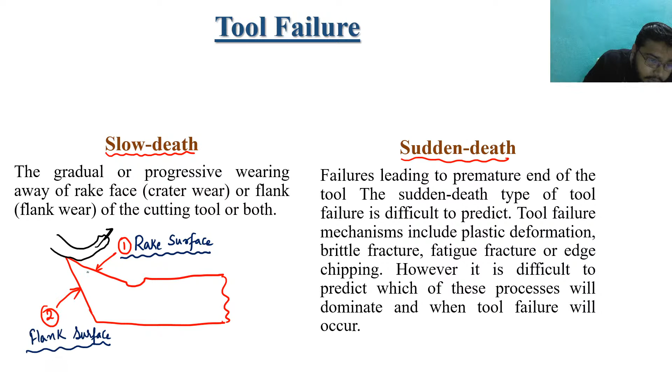So what happens when we are machining: suppose the chip flows like that, in this way. So the chip will try to erode these parts. This part of the cutting tool gets eroded, and sometimes the flank surface also gets eroded.

So there is gradual or progressive wearing away of the rake surface. This gradual wearing in the rake surface is known as crater wear. Whatever wearing happens in the rake surface is known as crater wear. And on the flank surface, whatever wear and tear of the tool happens is known as flank wear. These two are the slow death type.

Why slow death? Because by varying the velocity and machining time, these things are relatable, and due to these things the failure takes place. But there are some sudden deaths too. Its meaning is failures leading to premature end of the tool. The sudden death type of tool failure is difficult to predict.

Suppose you are machining and all of a sudden the tool fails - what is the reason behind it? It is very difficult to predict sudden failures. Tool failure mechanisms include plastic deformation, brittle fractures, fatigue fracture, or edge chipping. However, it is difficult to predict which of these processes will dominate and when the tool failure will occur. So we cannot predict sudden failure, but we can predict slow failures, which are progressive and gradual, and which we can see with the naked eye.

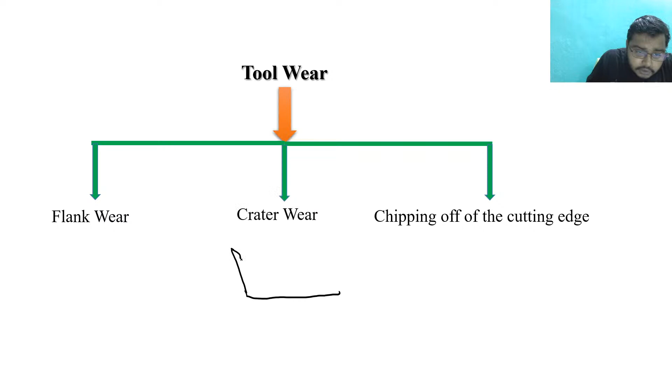So what happens on the rake surface? You will find something like that. So you can see here your rake surface. Here your rake surface is having a lot of deformities, right? A lot of wear. So you can see tool get weared out from the rake surface.

Similarly, for the crater, for the flank wear, the flank part of a tool gets weared out. This is the flank part which gets worn out. Fine. So this is how the tool wears. Generally tool wears we have seen are only flank wear and the crater wear. These are the two general things that you have to study.

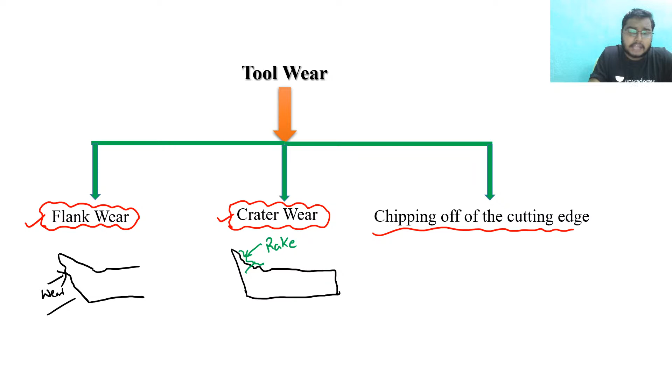So you know what the chipping off of the cutting is, I have already explained you. So now let's analyze these two wears, flank wear as well as the crater wear. So I have already told you what is the flank wear. So flank wear, any problem?

See, suppose earlier you are having the tool like this. Earlier you are having a tool like this, and you are machining it. So when you are machining, this is how the chip will move.

Now see, when your flank wear is there, what will happen? Earlier you were able to do this. Now due to the flank wear, your flank size will get reduced.

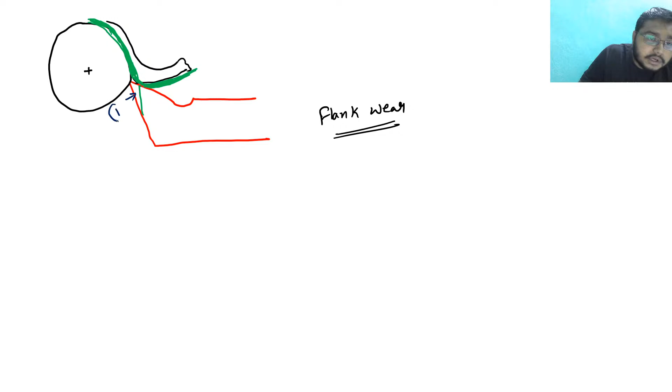So you can see the consequences of the flank wear. So earlier, suppose this is stage 1, before flank wear, and stage 2 can be written as after flank wear. Because after wearing, its size gets decreased. So due to this flank wear, the amount of chip that is removed got less.

So the amount of chip removed lowers down. Clear? So these are the consequences of decreasing flank wear, when your flank surface gets eroded, gets weared out. So these are the consequences of flank wear.

Let's see what are the reasons. So flank wear is also known as wear land. So the reason for flank wear is abrasion by hard particles and inclusions in the workpiece. So what happens, please understand.

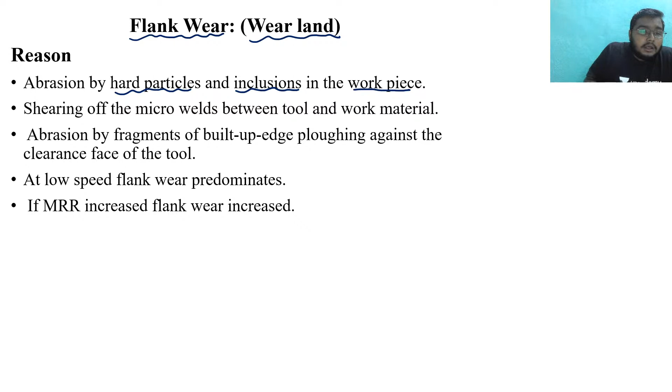So when you are machining a workpiece, suppose when you are machining a workpiece, and you have a tool, understand what will happen. So abrasion by hard particles, what happens? In the workpiece, there might be a condition in which some hard particles, any hard particles, may exist in that workpiece.

So any hard particles may exist on the workpiece, and those hard particles may be some inclusions also. So what happens when you are machining, when you are giving some velocity v and machining, a time will come when this tool will get interact with these hard particles. So suppose this is your tool, and suppose this is the hard particles. So the tool is moving, moving, moving. A time will come when this hard particle gets interacted with this tool.

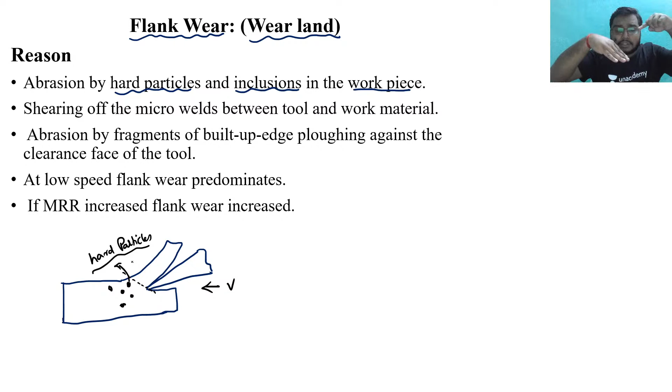All of a sudden this hard particle provides a shock, and this shock results in the wearing of the tool. So due to this abrasion takes place. So this is a wear mechanism. Let me write clear: abrasion is a wear mechanism.

So abrasion is a wear mechanism. Clear? Next is...

Shearing off the micro welds between tool and work material. What happens when chip is moving? When chip is moving and the tool is also moving at velocity v, a time will come at this point where some micro welds form between the tool and the chip, between the tool and the workpiece. These micro welds get sheared, and hence the wear of the tool takes place.

Next is abrasion by fragments of built-up edge ploughing against the clearance face of the tool. At low speed, flank wear predominates. So this is the most important thing, that at low speed, flank wear will be more. And if MRR is increased, flank wear will increase.

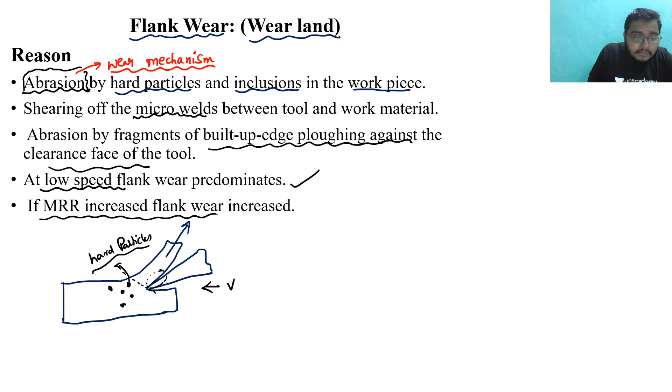Next thing is, flank wear directly affects the component dimensions produced. This is the first point. You have already seen how the flank wear can affect the component dimension produced. Earlier the dimension produced was such that chip movement was more.

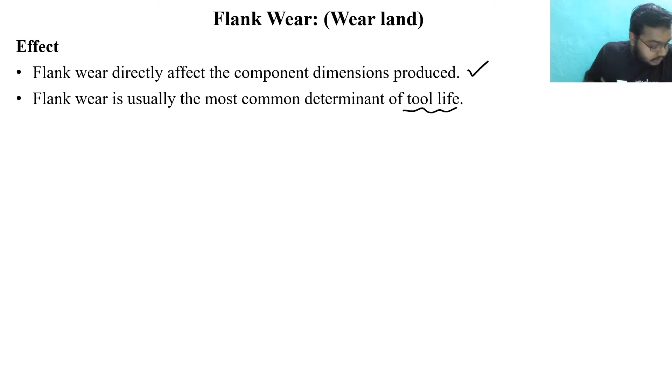Start from previous two slides, from this flank wear effects. In flank wear, what are the effects of the flank wear? The first point is flank wear directly affects the component dimensions produced. Yes, I am repeating. Flank wear directly affects the components dimensions produced. How does it directly affect the component dimensions produced? We have seen here what happened.

This is, suppose, before the flank wear and after the flank wear situation. Before the flank wear, the amount of chip removed from the workpiece was more, but after the flank wear, the amount of chip removed is less. So it directly affects the component dimensions produced. It signifies how much dimensions of the chip get removed or how much of the dimensions of the workpiece get formed. These things depend on the flank wear.

Clear? Next is, flank wear is usually the most common determinant of tool life. So to predict the tool life, to analyze the tool life, flank wear is a very important point. Clear?

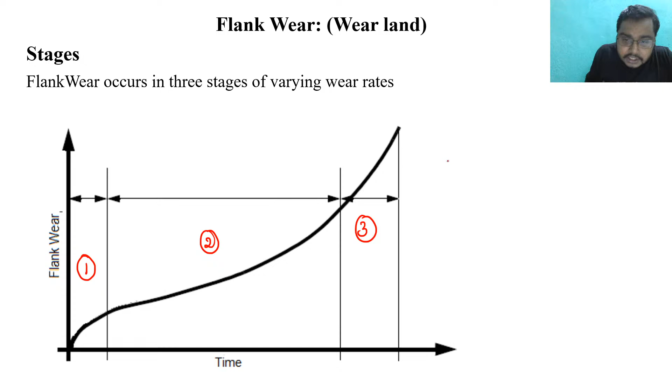Clear to everyone? Now, flank wear occurs in three stages of varying wear rates. So basically flank wear occurs in three stages. What are the three stages? First stage is primary. Second is secondary. And the third is tertiary.

So these are the three stages which you can see in the graph. I have pointed these things with the numbers 1, 2 and 3. On the y-axis, flank wear is plotted, and on the x-axis, time is plotted. Based upon the time, how the flank wear varies and what is the significance of each stage, let's study in this slide.

Primary wear is the region where the sharp cutting edge is quickly broken down and a finite wear land is established. So in primary wear, which is the first stage, the sharp cutting edge is quickly broken down. In this stage, the cutting edge is broken down. So this is the primary stage.

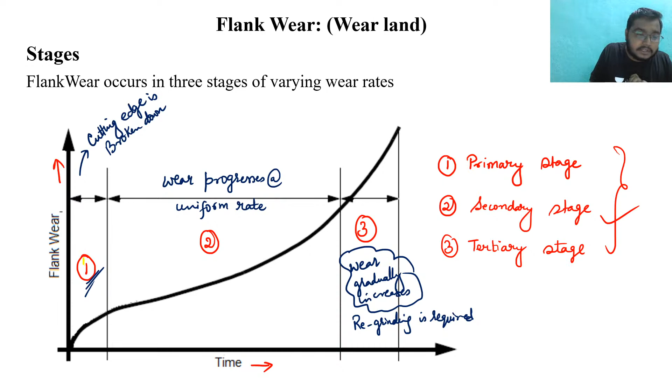So basically, there are three stages of flank wear. First is the primary stage - in the primary stage, the cutting edge is broken down. Next stage is the secondary stage, and in the secondary stage, wear progresses at a uniform rate. Third stage is the tertiary stage, and in this tertiary stage, wear gradually increases and regrinding is required.

Yes, Indrajit, sharpening of the tool is required. So basically this was the story of flank wear.

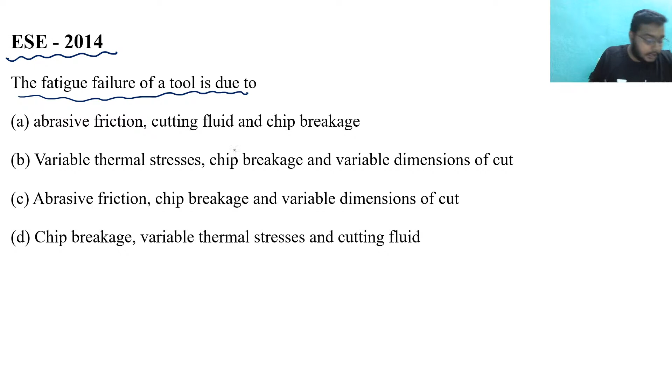See here, in fatigue failure of a tool - in machine design what you have studied, what is fatigue, or in strength of materials you may be studying this. What is this fatigue?

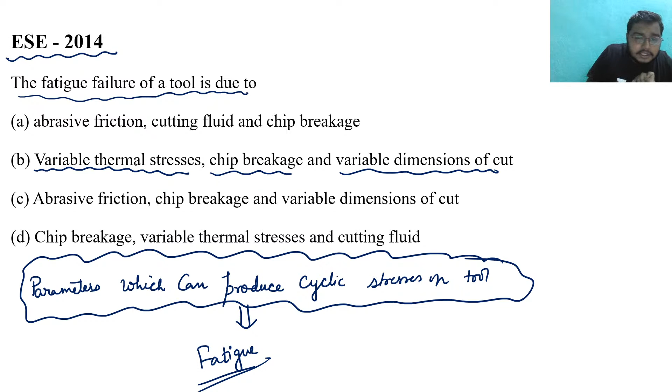In terms of mechanical engineering, fatigue means that due to a lot of loading, stresses and everything, material gets fatigued. These things are due to variable thermal stresses, chip breakage. So keep in mind the parameters which can produce cyclic stresses on the tool - this is important. You just have to see which parameters can produce cyclic stresses on the tool, and these things are leading to fatigue. Clear? So variable thermal stresses, chip breakage and variable - everything is there in this option. So option B is your correct answer.

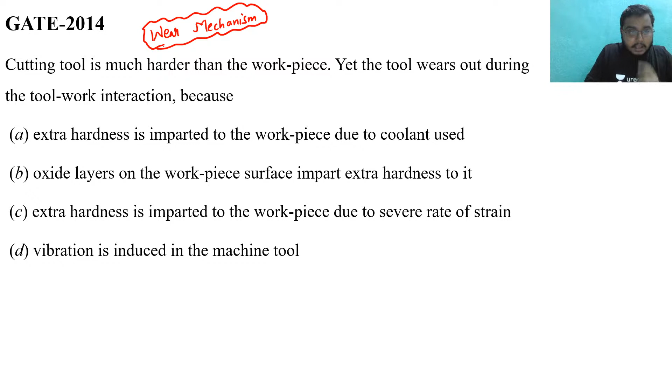Tell me the answer. Okay, Mukta has told the answer of C. I think you are telling about the previous question. So, yes, that is correct.

But once you understand that wear mechanism, then you will be more comfortable to tackle those questions. That's why I left that question.

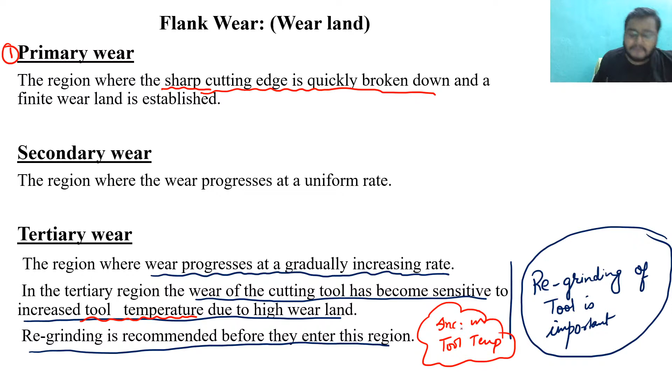What is the second thing? In this, the cutting tool has become more sensitive to increased tool temperature. So there is an increase in tool temperature, and this increase is very drastic.

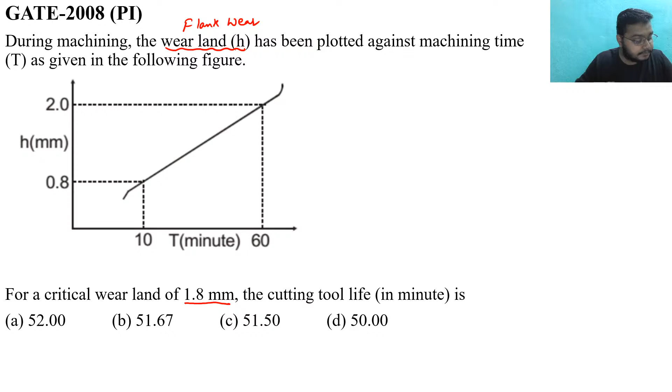Can you tell me what is the logic to solve this question? What should be the logic to solve this question, or what should be the step?

Yes, Asis has given a hint by using a straight line. See all of you, for point 8 and 10, this is the one coordinate that we are getting, and the other coordinate that we are getting is 10 comma 0.8. Another coordinate that we are getting is 60 comma 2.

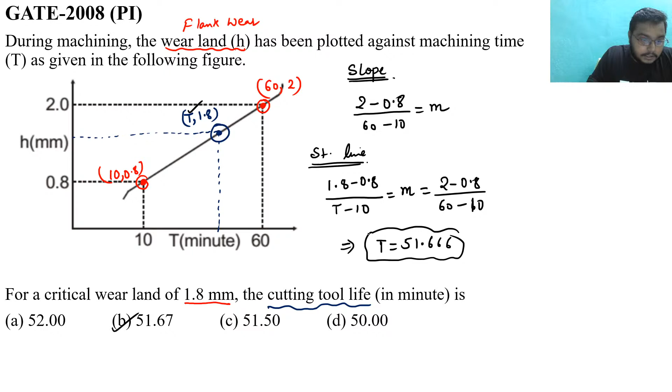Okay, okay. So I got a reply that everything is clear.

So now we are going to see the crater wear. We know that on a rake surface, whatever wear is there, that is known as crater wear. Why is it known as crater? Because the wear looks like a crater, and hence the name is crater wear.

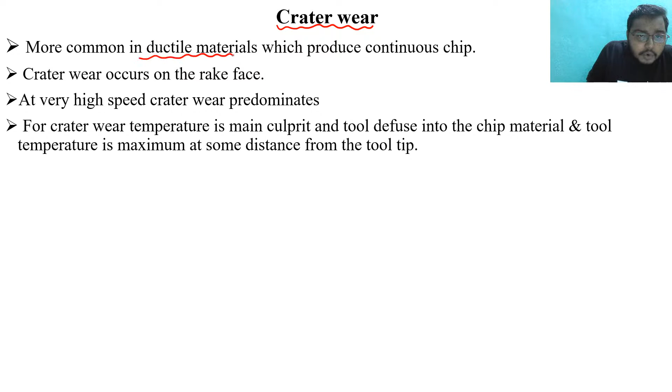It is more common in ductile materials which produce continuous chip. What is the most important point? It occurs in ductile material, and we have already seen in the chips lecture that ductile metals generally produce continuous chip. Crater wear occurs on the rake surface.

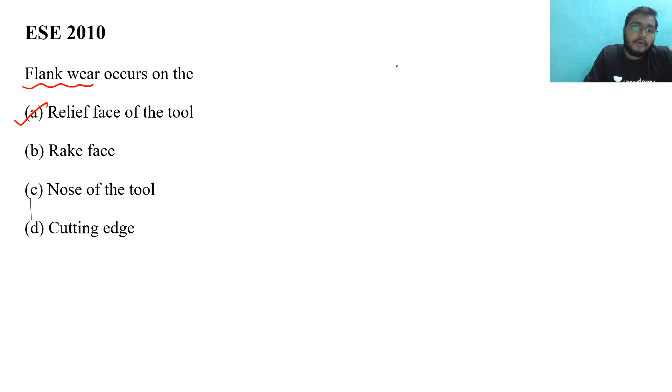This is understood. Now, at very high speed, crater wear predominates. So high speed is for crater wear, and for flank wear, low speed is there.

Can you relate those things? In flank wear, low speed will be there, and high speed will cause problems on the rake surface, and in that rake surface, crater wear will be there.

Next, for crater wear, temperature is the main culprit, and the tool diffuses into the chip material. Tool temperature is maximum at some distance from the tool tip.

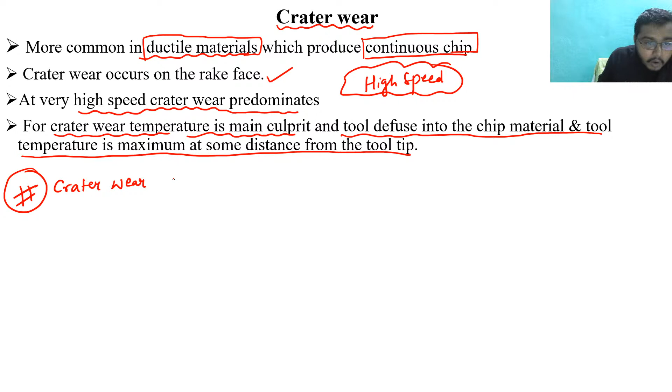So the most important point to note is that crater wear always starts at some distance from the tool and chip interface.

This is because at that point, the tool and chip interface temperature is maximum. This is the reason why crater wear always starts at some distance from the tool chip interface.

So the most important thing is that it happens due to temperature. Temperature is maximum, high speed is there, ductile material will be there, and it occurs in the case of continuous chip. So these are some of the key points.

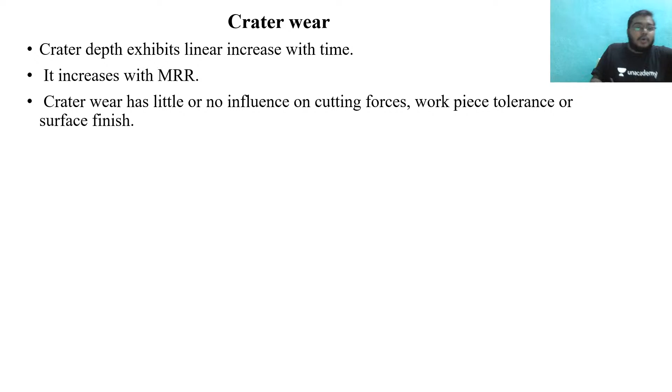So crater wear increases due to the material removal rate. The first point is that it increases with MRR. This is the thing, that it increases with the material removal rate. Clear?

Next is that crater depth exhibits a linear increase in time. We have already seen this, the linear increase over time. Crater wear has little or no influence on cutting forces, workpiece tolerance, or surface finish. This is an important point. So this is all about the story of crater wear.

See, in high speed, what happens, Kiran? At high speed, the temperature at that point gets increased. The temperature at the rake surface gets increased, and due to the increase in temperature, there is wearing.

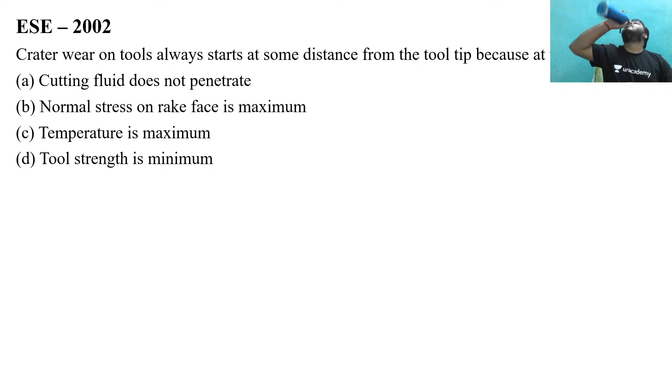See, I have just explained you. The crater wear always starts at some distance from the tool chip because due to the tool and chip interface, temperature is maximum. So temperature is your maximum, and due to this reason the crater wear on the tool always starts at some distance from the tool chip interface.

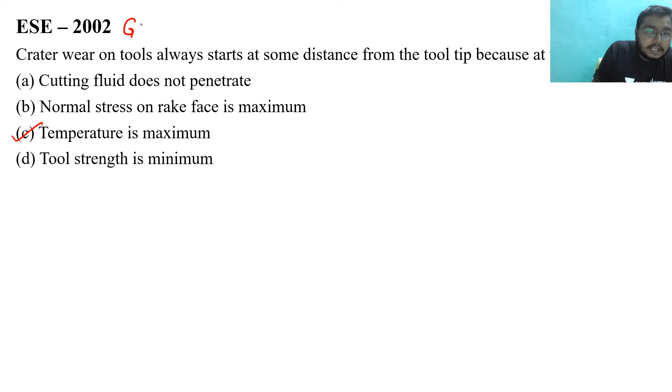Let me tell you, this question has been also asked in GATE. I don't remember the actual year, but yes, I could remember that this question was asked in GATE also. Next, tell me the answer.

Same thing is there. Tool temperature is maximum in that region, right? Different examinations ask this question because it is one of the conceptual questions, and once everything is understandable to you, all questions will become solvable.

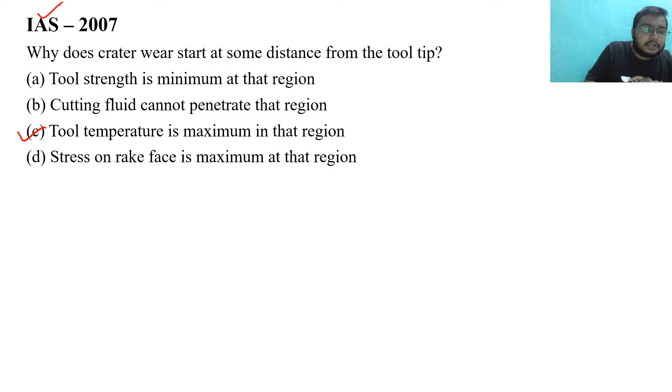Next, see again, IAS 2007. So what is that in this question? Crater wear starts at some distance from the tool tip because tool temperature is maximum at that region. Clear, sir? So back to back same questions in different exams. It has been asked in GATE, and it has been asked in ESE 2002, IAS 2007. Same question is there, asked at multiple places.

Till now, everything is clear to you. Now I'm going to start a new subtopic: wear mechanism. Let me know if you have any doubts, or I will start the new topic, wear mechanism.

Okay, so I assume that you don't have any doubt since you are not telling me. So now we are going to discuss what are the wear mechanisms that are involved in this tool wear. First is your abrasion wear.

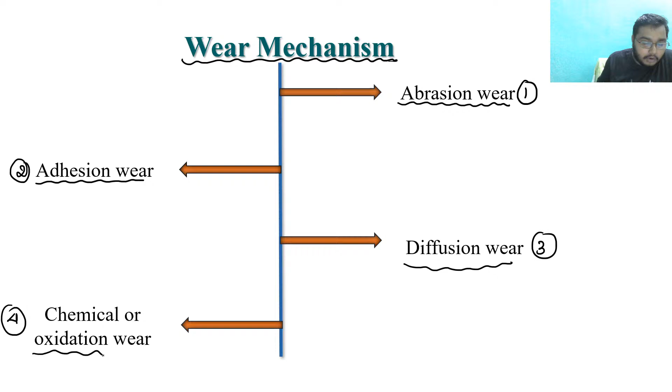First is your abrasion wear. What happens in the abrasion wear, we are going to see at the later stage. Next is your adhesion wear. Third is your diffusion wear. Fourth is chemical or oxidation wear. Let's see one by one the wears.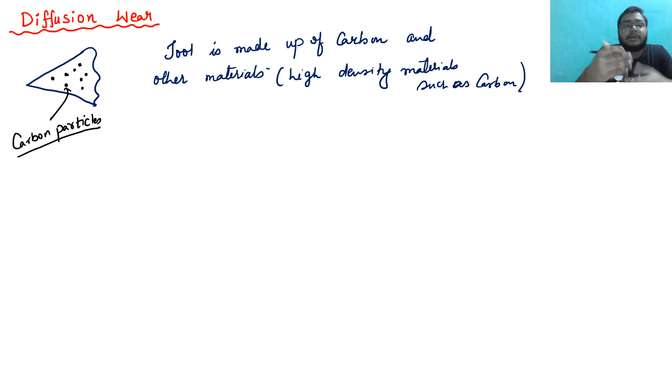So now what happens is that this tool is made up of carbon and other materials. These materials are high density materials such as carbon. So this is the tool, the story of the tool. Tool is made up of some carbon or other high density materials, more specifically carbon.

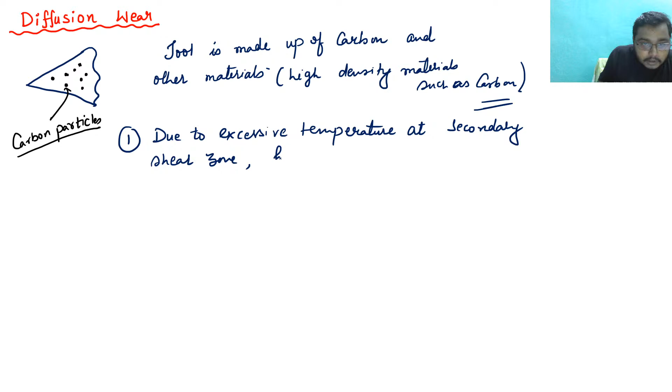Now see, due to excessive temperature at the chip and tool interface, at the secondary shear zone, high density particles from the tool go to the chip. What happens from the tool? High density particles go to the chip. That is, the carbon particles move to the chip. Now see the condition.

What is the problem? My audio video is clear to you or not? Not clear? Why the hell there is so much of problem?

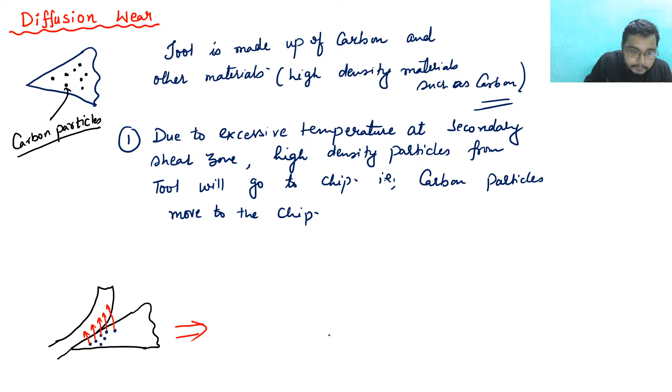So what will happen is that carbon particles will move to the chip, and hence when it moves to the chip, it simply means that tool becomes weaker. Clear? How is tool becoming weaker? Due to this diffusion mechanism. So just what is the gist? Carbon particles move to the chip due to the high temperature.

So this is the basic thing, and due to this, tool becomes weak. So weakness in the tool. Clear? So I got the answer from you, everything is clear. So this is the story of the diffusion. Now next is your adhesion.

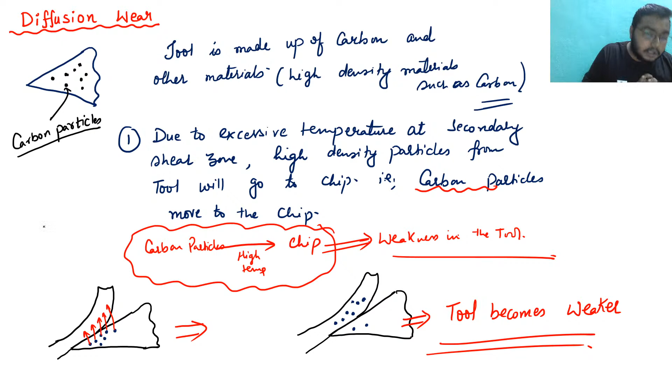Next is your adhesion. So what happens? Let me tell you one thing. What is the key takeaway point from this? We have seen diffusion wear is due to the molecular transfer.

Clear? Diffusion wear, why does it happen? This is only because of molecular transfer. What is the molecular transfer, sir? Carbon particle, that particle is the molecule, and this molecule gets transferred to the chip. So this is the phenomena.

Next is the adhesion. Now see what happens in this adhesion. At high temperature produced at the chip tool interface, shearing action of chips takes place.

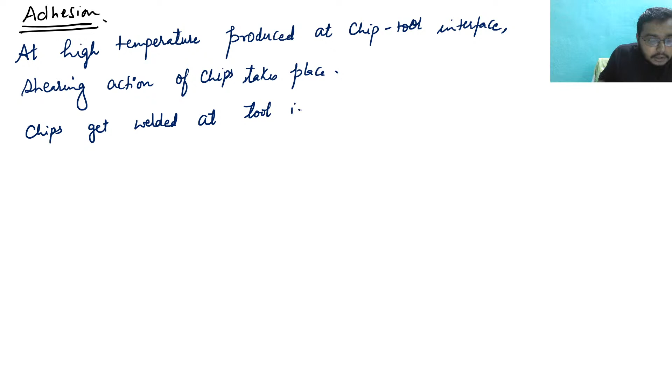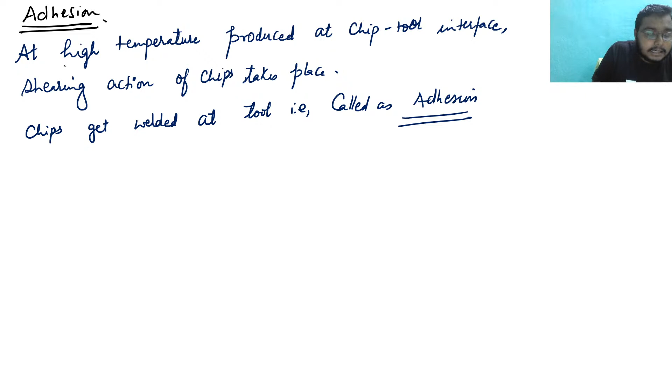And due to this, chips get welded at the tool, that is called adhesion. What happens here is that at high temperature produced at the chip tool interface, shearing action of the chips takes place, and this chip gets welded at the tool.

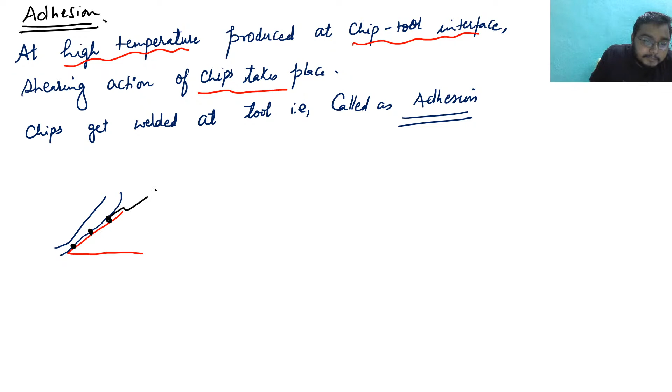Suppose this is your tool and this is the chip. So what happens, the part of the chip gets welded. Suppose at this point it is micro welded, at this point it is micro welded, at this point it is micro welded. So sometimes this micro welding takes place, and that part gets adhesed, right? Due to the adhesion, micro welding takes place.

And what will happen once the part gets micro welded? So after using, whether that part will erode the tool or that part will stick to the tool. Clear? That chip part, whether it will erode the tool or stick to that tool - in both cases, the wearing of the tool takes place.

Yes, Kiran, right. Built up edge is also because of adhesion. Yes, correct.

So this is the thing in adhesion, right? This is the story of the adhesion. Now I'll explain the next one. I have to take some slides.

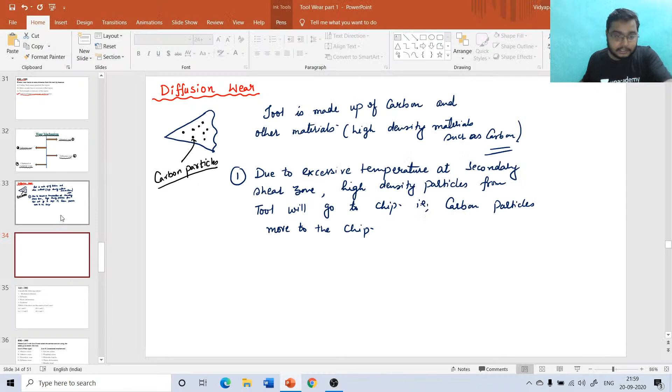So now I'm explaining to you the abrasion. I don't think you have any doubt till now, because I'm explaining very slowly as well as very neatly, so you should not have any confusion. But even if you have any confusion, let me know. Abrasion, next wear mechanism is your abrasion. So one most important thing is there.

So what is the key takeaway point from this adhesion is that there is a formation of metallic bond in adhesion. Clear? So what is the thing that we are learning, slowly and slowly? Due to the molecular transfer, diffusion wear is there, and due to the metallic bond, this adhesion takes place. Clear? Next is your abrasion.

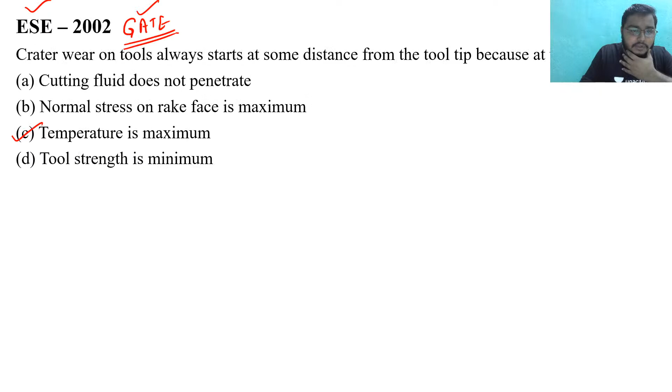Now see, I have already told you, in this question when I was discussing with you - let me find that question. When I was telling you about flank wear, in this flank wear, this one thing was there: abrasion by hard particles and inclusions in the workpiece. What is the meaning of that? I have already explained at that time, but let me explain once again. Hard particles and inclusions are there in the workpiece.

So suppose this is your workpiece. Okay, suppose this is your workpiece.

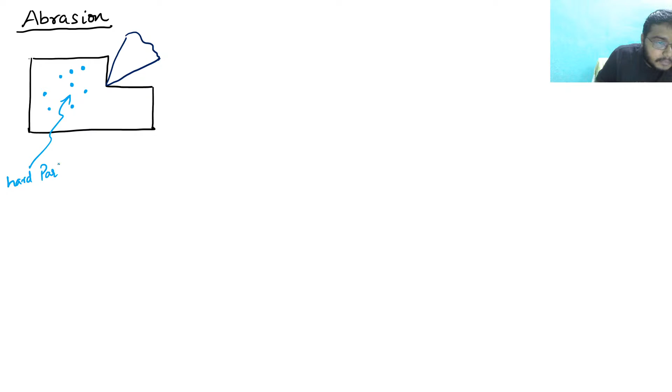Okay, so this is the tool, and in this workpiece some hard particles are already present. Let these things be the very hard particles, that is carbons or inclusions. So these are your hard particles plus inclusions.

So what will happen when you are giving the velocity v? At a time these hard particles get interacted with this tool, and this hard particle will impart a shock in this tool, and hence there is a sudden shock, and due to this sudden shock abrasion would be there. Suppose this is your tool, so earlier this was the tool structure, and when the abrasive particle strikes it, the tool structure gets damaged drastically.

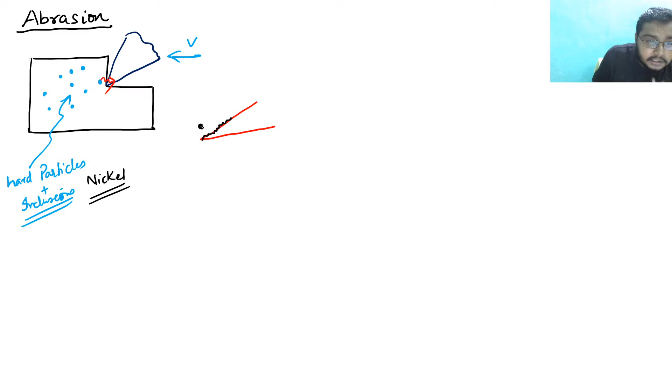So suppose the hard particles are sometimes like nickel, carbon are also there. These type of particles are also present during abrasion. So what happens is that particle, that abrasive particle, that hard particle erodes this part, takes out this part and moves it away, tries to move this part away from the tool. So you can understand, this is something which is plowing action.

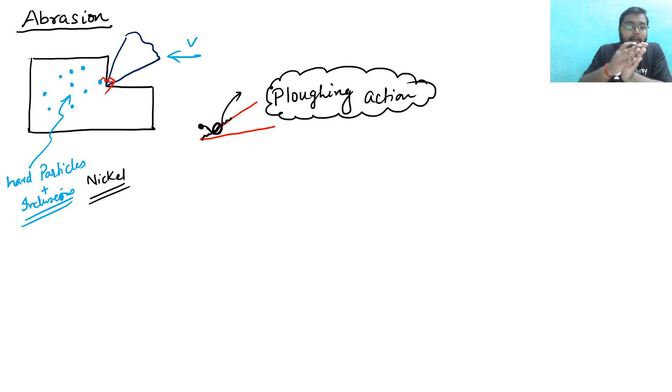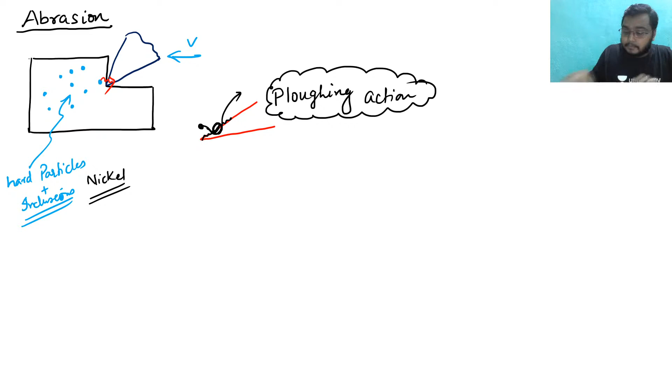So this is plowing action. What happens is the tool is here, this is the rake surface of a tool, and this abrasive particle comes, uproots things and takes them away. So at a sudden it gives the load, it gives the part, and this rake surface gets eroded, and this is the plowing action of the abrasion mechanism. So is this clear? This is the logic behind abrasion.

Next is your chemical oxidation.

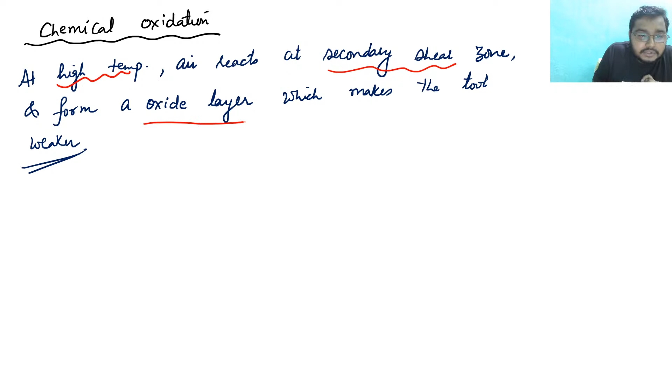So what happens is at high temperature, air reacts at the secondary shear zone and forms an oxide layer which makes the tool weaker. So due to the chemical oxidation, due to the high temperature, air reacts at secondary shear zone and it forms the oxide layer, and due to this, the tool becomes weaker.

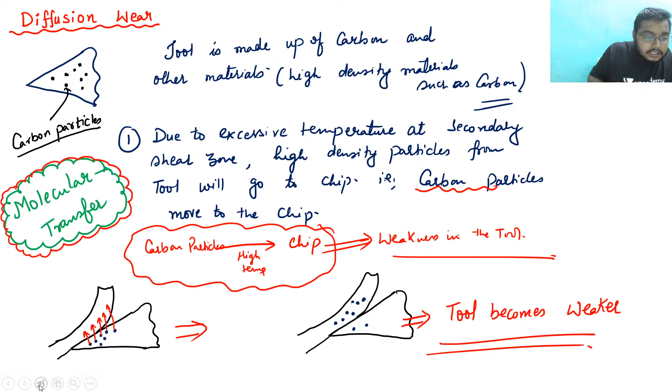So this is the whole mechanism of wear mechanism. This is wear mechanism number 4, this is wear mechanism number 3, this is wear mechanism number 2, and this is wear mechanism number 1. I have explained these wear mechanisms in great detail, and I don't think you will have any confusion till now.

So please tell me the answer of this question. Please try to solve this question and give me the answer. These questions are based upon the concepts I have told you. So you will be able to attempt this question. I want the answers from everyone.

Next, try to solve this question. Try to solve this question.

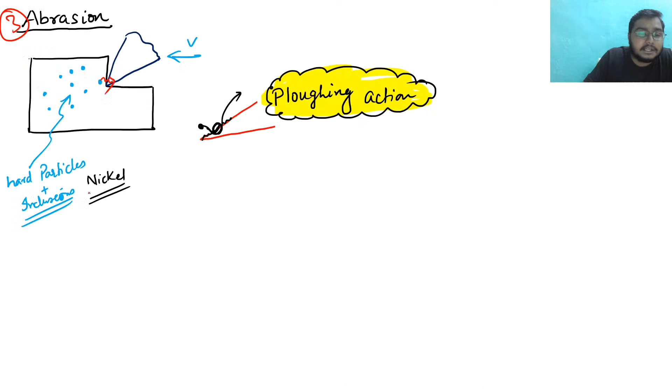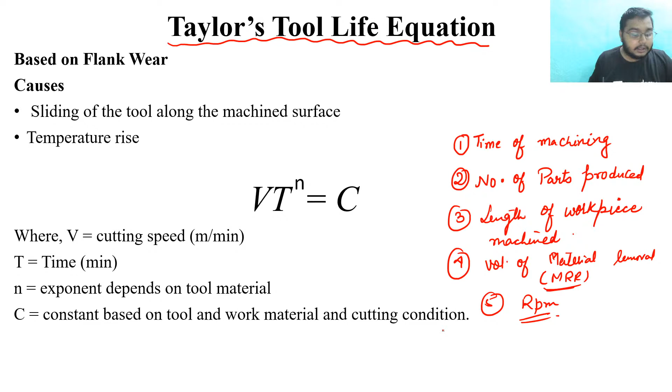Okay, next point is your RPM, the RPM of the tool. So these points are there which really affect the tool life.

A scientist named Taylor gave an equation for this. Taylor did a fantastic job, and in that he gave a relation between the cutting speed and the tool life. V is the cutting speed in meter per minute, T is the time in minutes, N is the exponent depending on the tool material, and C is the constant based on tool and work material and cutting conditions. So here the constant C changes for different tool and work materials.

This relation is called Taylor's tool life equation. This is based on the flank wear, so sliding of tool along the machined surface, and temperature rise, which we have already seen. These are the causes due to which flank wear actually happens, and based upon these reasons, Taylor gave this equation: V t to the power n equals constant, where V, T, N and C have their usual meanings as mentioned.

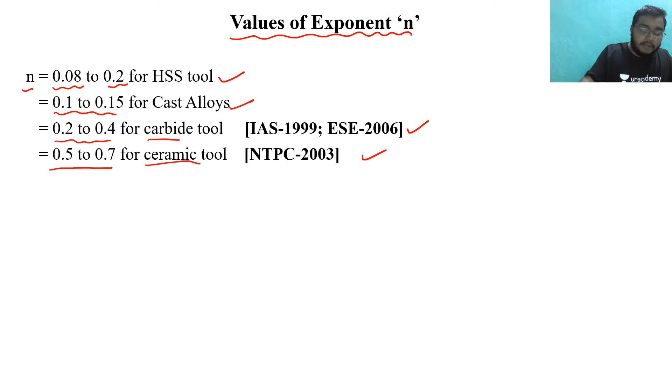Now see, one more observation I want to tell you: V t to the power n is equal to constant. So if I say V1 t1 to the power n equals V2 t2 to the power n, sometimes what happens is you have to find n. So how do you find n?

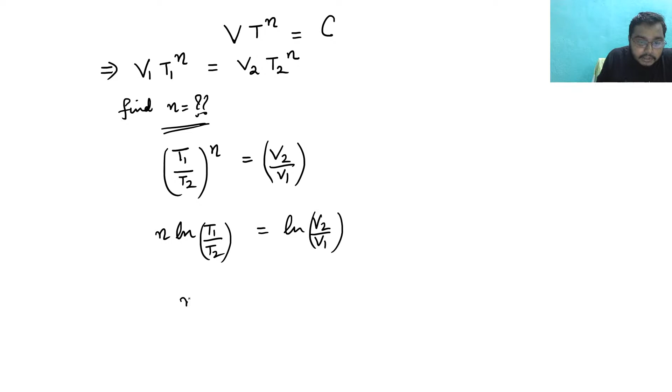I am making the equation simpler for you, so that whenever you encounter this problem to find n, you just use this equation. So, taking log, that is ln, on both sides: n ln(t1/t2) is equal to ln(v2/v1), and from here you get n is equal to ln(v2/v1) divided by ln(t1/t2). Clear? So this is the equation to find n.

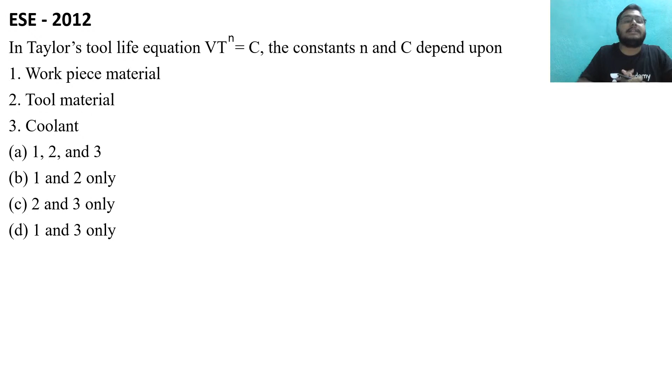So now here is a question for you, the best question asked in ESE 2012. Tell me the answer. Try to solve this question. This question is very easy. It has been asked in ESE in the year 2012. Tell me the answer.

Could you check your answer? Mukta, Asis, both of you.

See everyone, what is the logic? We can see here this term - what is the term? Cutting condition. Work material and the tool. So Taylor's tool life equation depends on the tool, depends on the work material, and depends on the cutting condition.

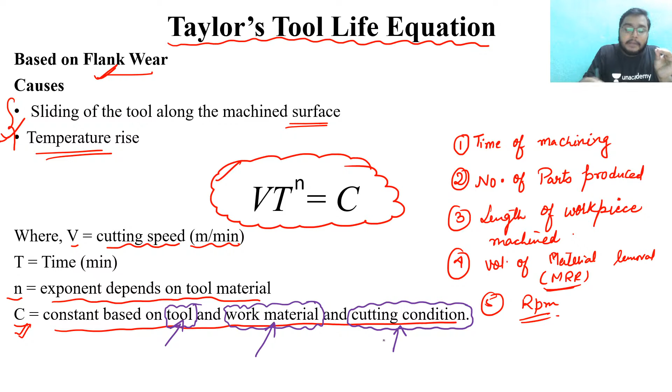So what we can see from the cutting condition, the use of the coolant actually comes under the umbrella of cutting conditions. What should be your cutting conditions? And hence work material is important, tool material is important, and the coolant is also important. So in Taylor's tool life equation, VT to the power n equals C, constants n and C depend on these three things: work material, tool, and coolant, and hence option A is going to be your answer.

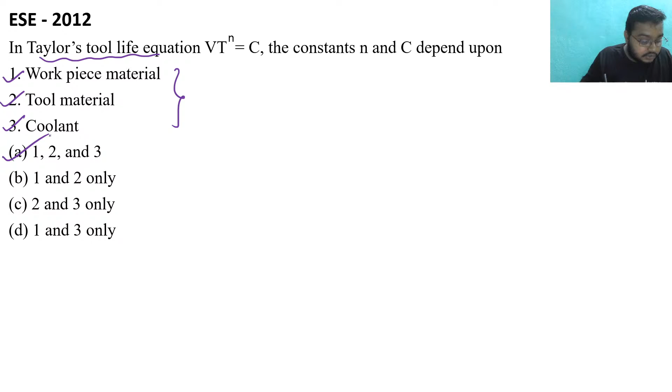Clear, sir? These questions are very confusing. You will get confused very easily. But the logic is that you have to understand each and every word I have given to you.

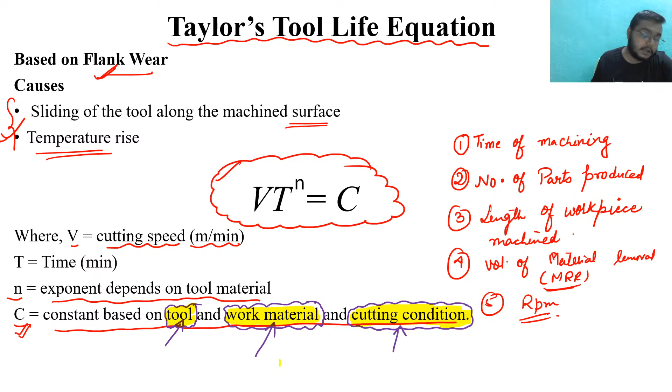Okay, and these things really determine how you solve the question. Now please solve this question. There is another question, kindly try to solve it. ESE 2008 question is there.

Now again, for cemented carbide, what would be there? These things are for your practice. For cemented carbide, what are the things that would be there?

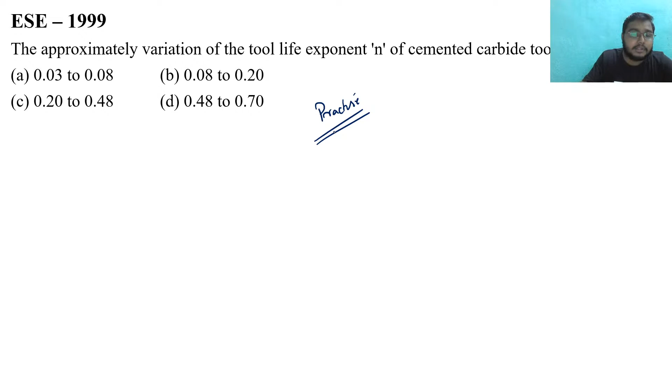Now here comes the question, a good question. Try to solve this question. I am giving you 2 minutes time, and within this time, try to solve this question. You are giving the answer as option C. Okay fine, that's okay. Now please try to solve this question.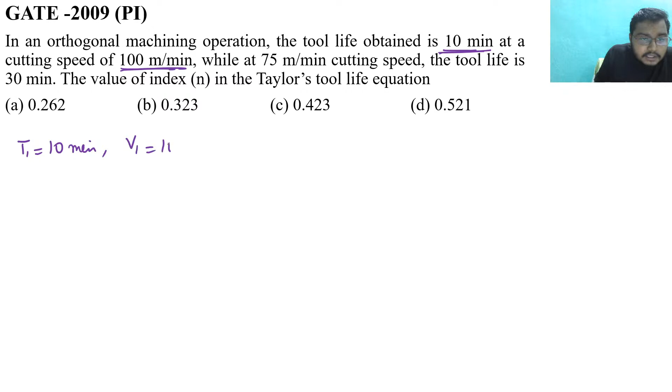So see, earlier this is the time which is given: T1 is given as 10 minutes, cutting speed is given as 100 meter per minute, so V1 is 100 meter per minute. Next, 75 meter per minute is given as V2. And the tool life is 30 minutes, so T2 is the tool life, that is 30 minutes. So now how can you find n? By using Taylor's tool life equation.

And what is the Taylor's tool life equation, sir? Taylor's tool life equation is V1 T1 to the power n equals V2 T2 to the power n. Just plug in the values, right? Or you can use the formula I have written here. See this formula, just put the values in and you will get the answer.

So, 100 into 10 to the power of n equals 75 into 30 to the power of n, and from here the n value would come around 0.2618, so that is roughly 0.262.

Clear? Clear, sir? Concept is clear, sir? So this is how you can solve the question.

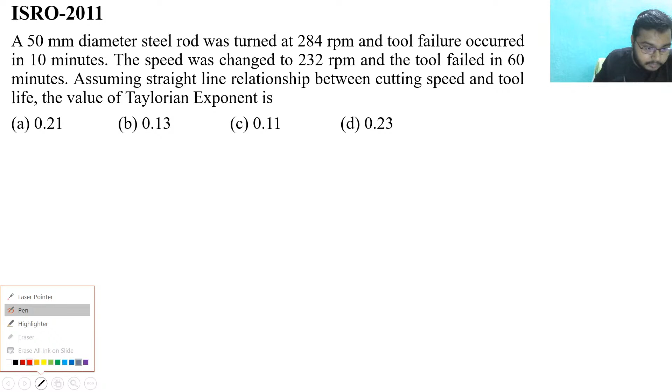See, now I will solve the question. A 50 diameter steel rod was turned at 284 rpm. So the n value, n1, is given as 284 rpm, and this is the diameter.

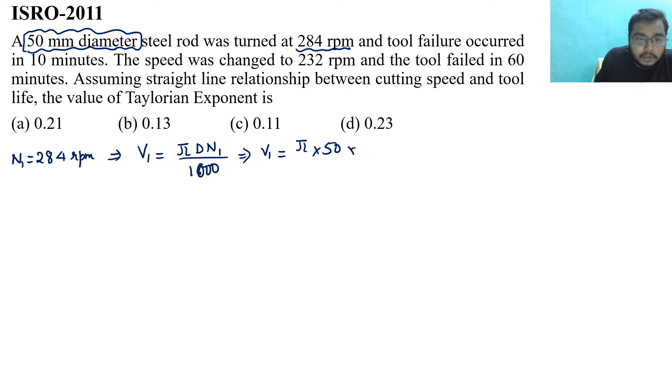Since n1 is given, what would be your V1? V1 would be pi d n1 by 1000. Why 1000? Because this is in mm. So V1 is pi, d is 50, n is 284, by 1000, giving the answer in meters per minute.

Next is your n2. The speed changed to 232 rpm and the tool failed in 60 minutes. Earlier T1 was the tool life. N2 is 232 rpm, so velocity 2 would be pi d n2 by 1000, which is pi 50 into 232 by 1000.

The reason I am doing these things I'll explain in a minute, because there is a trick involved here, but I'm explaining because there is some reason behind it. So in this case, T1 is 10 minutes and T2 is 60 minutes.

By applying Taylor's tool life equation, V1 T1 to the power n equals V2 T2 to the power n, when you plug in the values you get pi 50 284 by 1000 into T1, that is 10, to the power n, equals pi 50 232 by 1000 into 60.

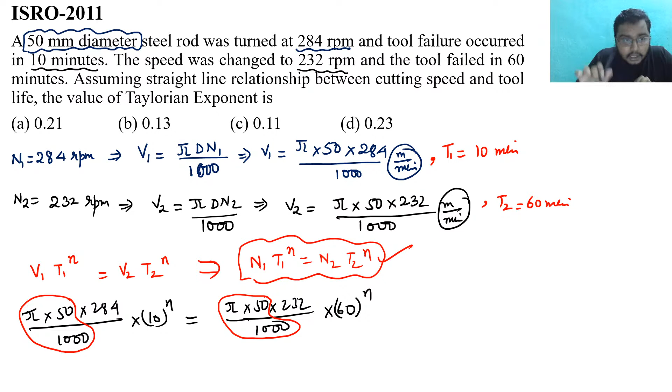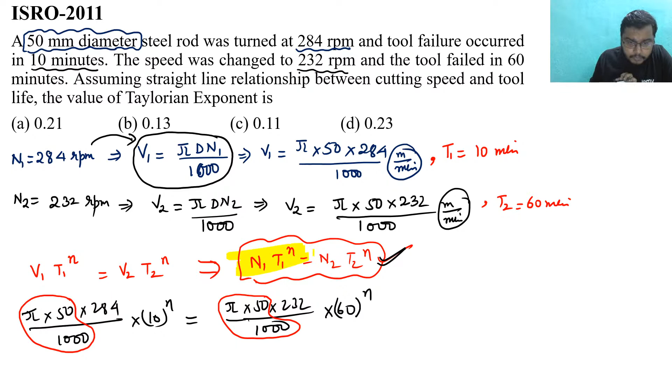Okay, now try to solve this question. Try to solve this question.

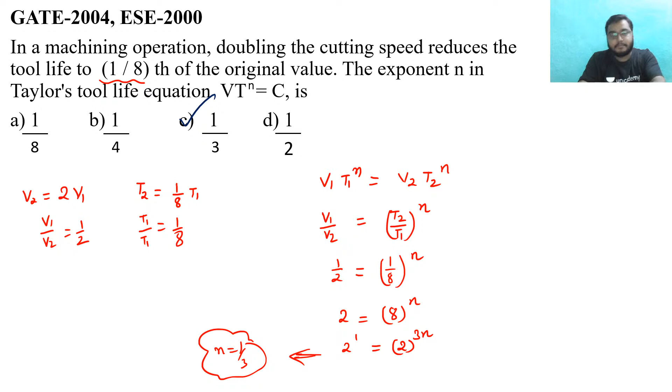Okay, now solve this question. Now try to solve this question.

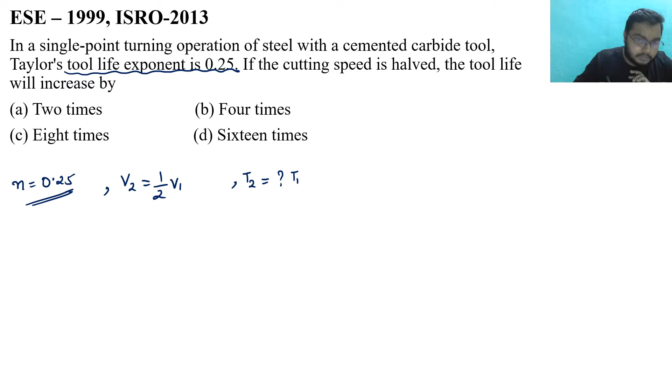I don't think there is a problem, you just need to find what T2 by T1 will be. This is the thing you have to find. I hope the question is clear to you. These questions are very basic, directly related with Vt to the power n is equal to constant, which is our famous Taylor's tool life equation. If you are well conversant with this equation, you can solve this question. These questions are asked in ISRO, ESE, GATE, every examination, whether SSC JE. Very easy question, try to solve it.

Okay, then I am solving this question. By Taylor's tool life equation, Vt to the power n is equal to constant. So V1 T1 to the power n is equal to V2 T2 to the power n.

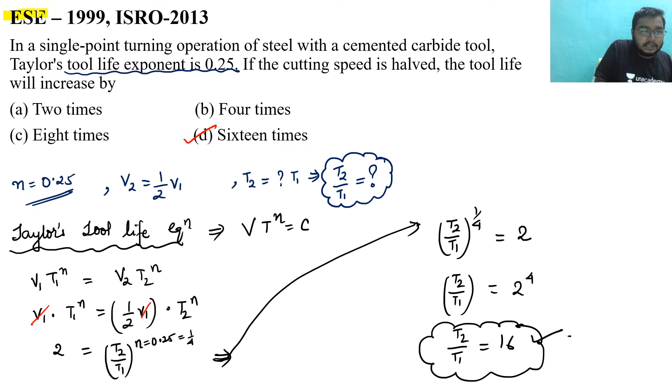I want to clear the concept of why I have given both these questions. Whether it is ESE or ISRO, whether the year is 1999 or 2013, or whether it is GATE in 2016, all are brothers. These exam bodies take questions from ESE and put them in GATE, take questions from GATE and put them in ESE, take questions from GATE and ESE and put them in ISRO. So you have to solve the previous year papers of these prestigious examinations, and once you do, no question will be left unturned. If you practice a lot in this manufacturing subject, I can guarantee no question will be unturned. I can bet you.

Okay, now see this question. In this question, Taylor exponent is 0.25, cutting speed is halved, tool life will be what?

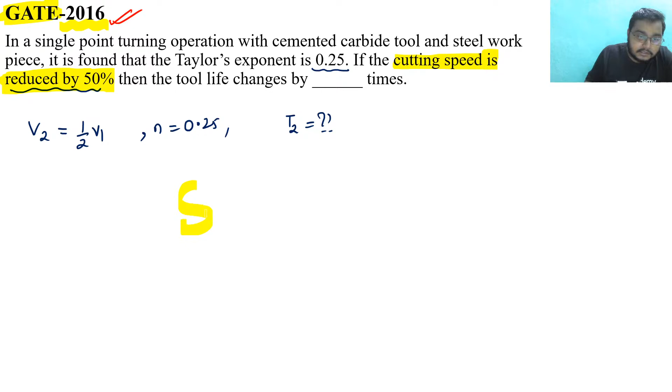Sir, same. Okay, same, same, same. So the style of asking the question may be different, but eventually the concept remains the same. This is why I stress that you have a limited amount of concepts to study for GATE. If you practice, and re-practice the questions, eventually you will solve everything.